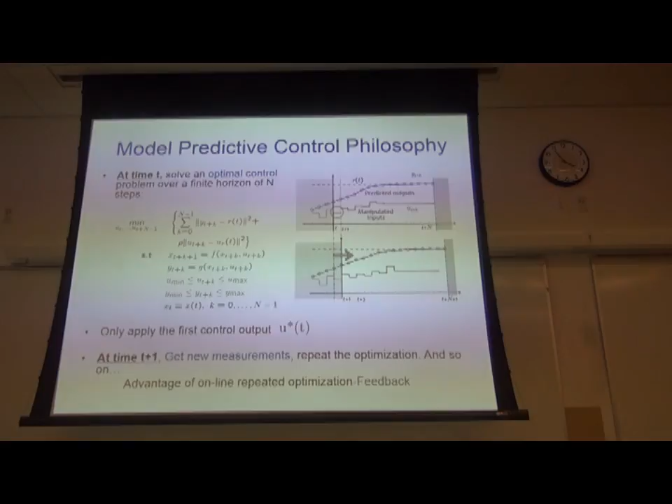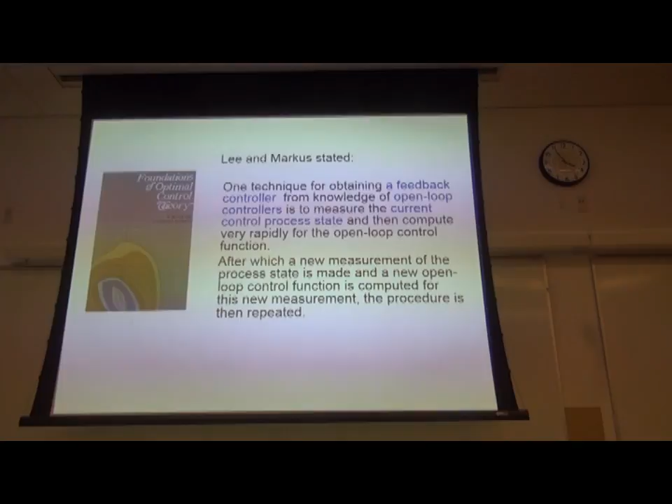So actually, this book was published in 1967. And in this book, Lee and Markus stated that to transfer open loop control to feedback control, we just measure the current control process state and then compute very rapidly the open loop control function. And by this way, we can transfer the open loop control to a feedback control.

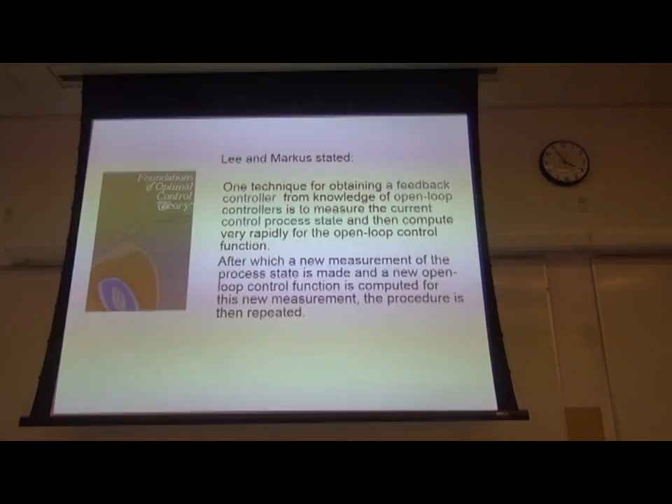And we can see this is the basic idea that model predictive control has used. So based on this idea, we can transfer RIOTS 95 to model predictive control, closing the loop.

Here we need to pay attention: RIOTS 95 provides three kinds of integration methods, Euler, Runge-Kutta, and Lobatto. For integral order, we just use Euler or Runge-Kutta. But for fractional order, we need Lobatto. It provides a higher accuracy method.

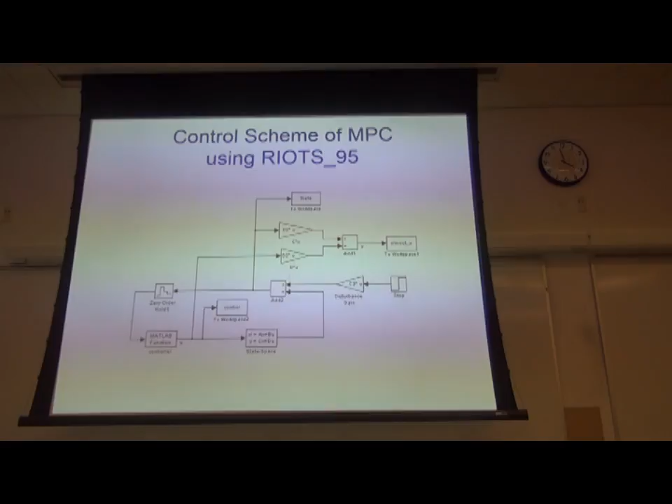Here we give the example of how RIOTS 95 MPC can control an unstable problem. We can say that this system has a positive root in the positive part of the complex plane. And we can see within 5 seconds it can reach the set point at 1. And this is the control output.

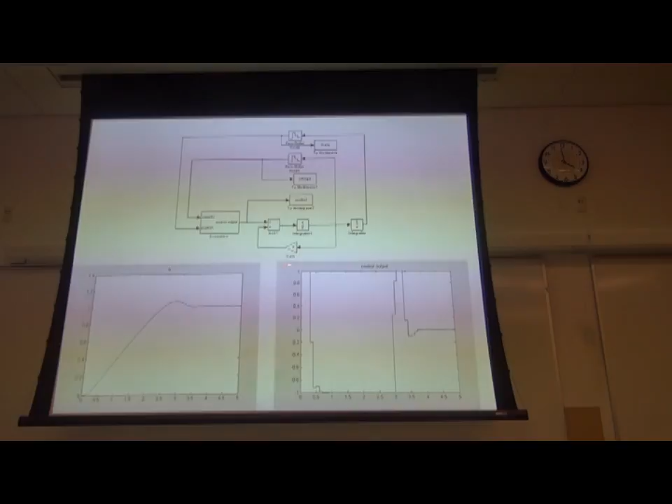Here we place the max value 1 at the control output. And here we have made a comparison with the MPC toolbox in MATLAB. And this is the example in the MPC toolbox in MATLAB. And here is the one built in MATLAB by RIOTS 95 MPC.

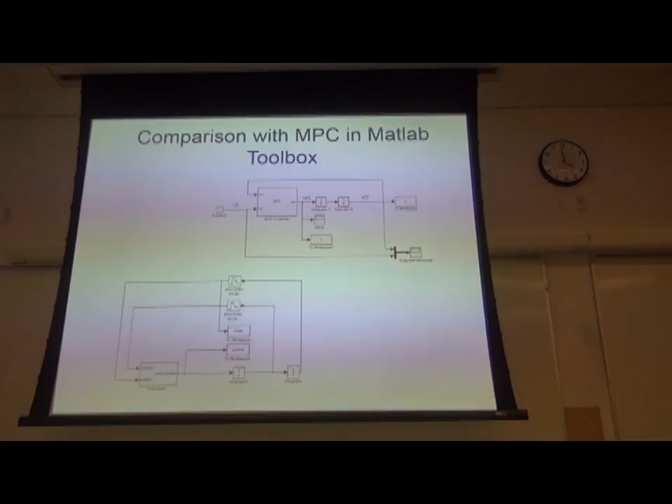And the sample time is 1.1, and this is the predictive horizon, and this is the manipulative horizon. And similarly, we have the predictive horizon, and we have the target value, that means the reference input, and here is also the reference input for the MATLAB Toolbox MPC.

And here we can see the dotted line is MATLAB MPC, and the solid line is RIOTS MPC. And here is the system output. Here we can see RIOTS MPC can get as good control performance as the MPC in the MATLAB Toolbox.

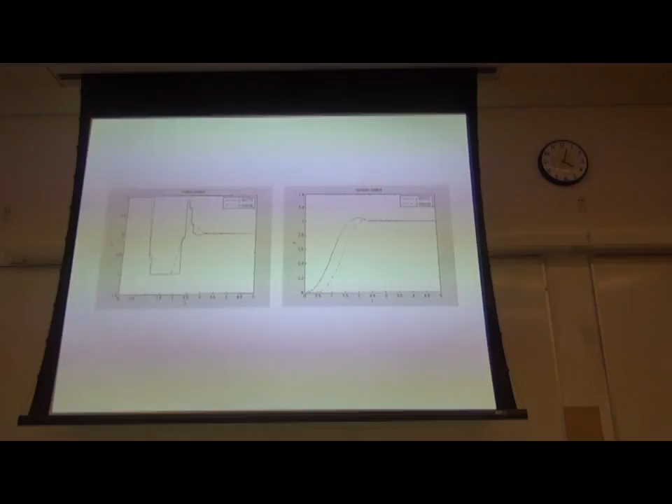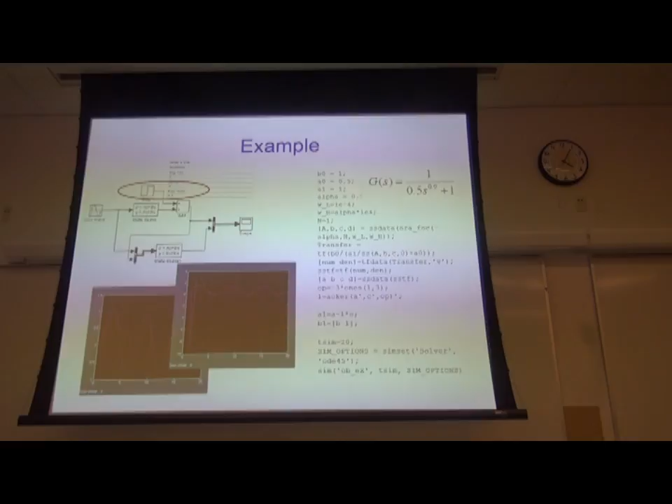And here is how we can extend the RIOTS MPC from integral order to fractional order. First, we use the Oustaloup recursive approximation to transfer the fractional order plant to an integral plant. And then we use the Luenberger observer to get the unknown state of the system. And then we use the RIOTS 95 MPC to control this problem.

And here is the control scheme of how RIOTS 95 MPC with observer controls the system. Here we should pay attention that the order of the observer may not be the same as the real system, because the real order of the system in practice we do not know. We just estimate.

So I give some examples to show that RIOTS 95 MPC can not only deal with a single input, single output system, but it can also deal with a multi-input, multi-output system.

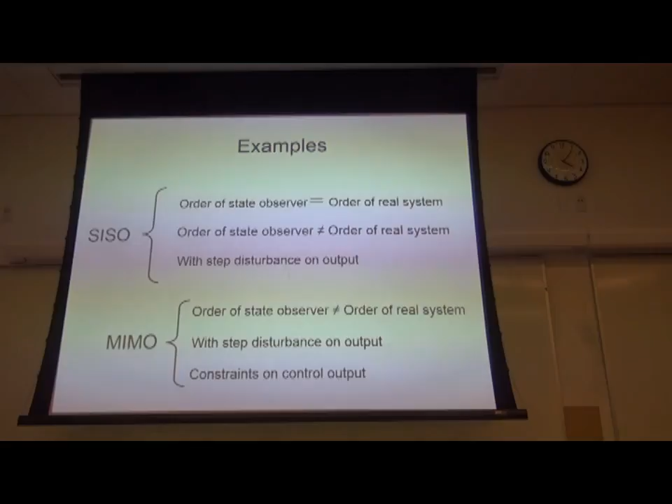Here is an example where the order of the observer is the same as the real system. We can see that the system output reaches the desired output. Here the set value is 10, and the control performance is good. And here we can see that the state obtained by the observer is really the same as the real system.

Here is the example where the order of the observer is not the same as the real system. Here the real system order is 9, and the order of the observer is 5. Here we can see that though the states of the observer are different from the states of the real system, the system output can also reach the desired output.

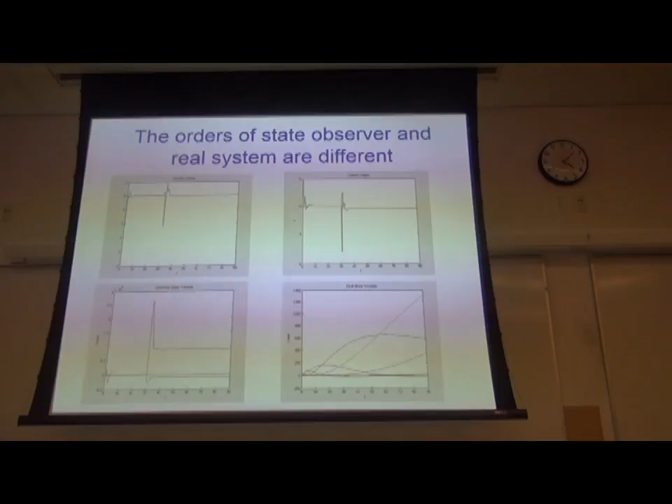And at 30 seconds we add a step disturbance. You can see that it can also reach the desired output as shown. And here I give an example of how RIOTS MPC can deal with a multi-input, multi-output system, for example the system described by this. It has 2 inputs and 2 outputs, and the desired output is 10 and 1 for the first and the second output. And here we also give a step disturbance at 30 seconds.

And here is the result. We can see the first and the second output can reach the desired output. And also at 30 seconds, when the step disturbance is added into the system, it can recover to the desired output within 3 seconds. Also note that this control output is as high as 12. So to show the constraints that RIOTS 95 can deal with, we place a control output constraint of 11 and 3 for each control output. Here we can see the control output is within the constraints.

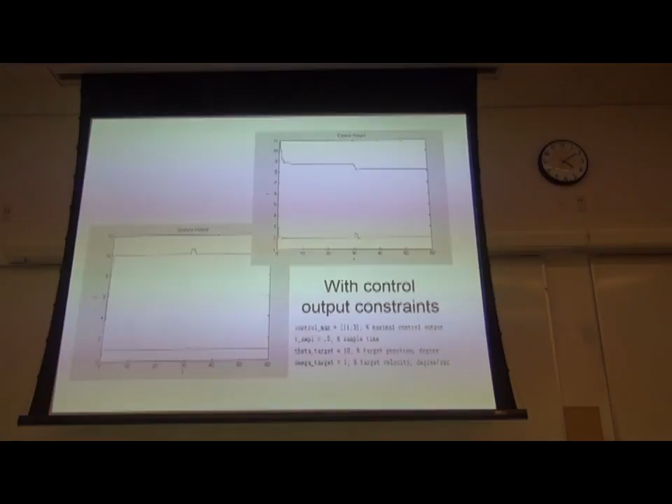And future work. From the examples shown, we know the RIOTS 95 MPC can deal with unstable systems, single-input single-output, and multi-input multi-output systems. But we did not deal with large time delay systems; I will try that.

Also, here we used the Luenberger observer to get the state of the real system, but this kind of observer is effective without stochastic noise. When there is stochastic noise, we may have to use the Kalman filter, and I will try that later. And later I'll try to test our RIOTS 95 MPC on this kind of TITO platform, 2 input, 2 output. That's all. Thank you very much.

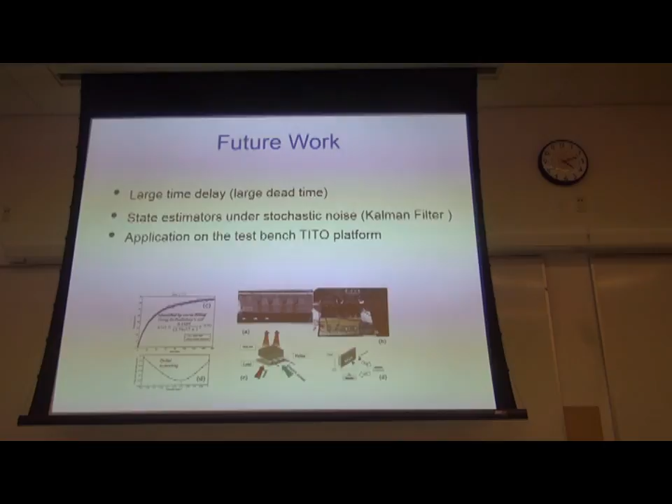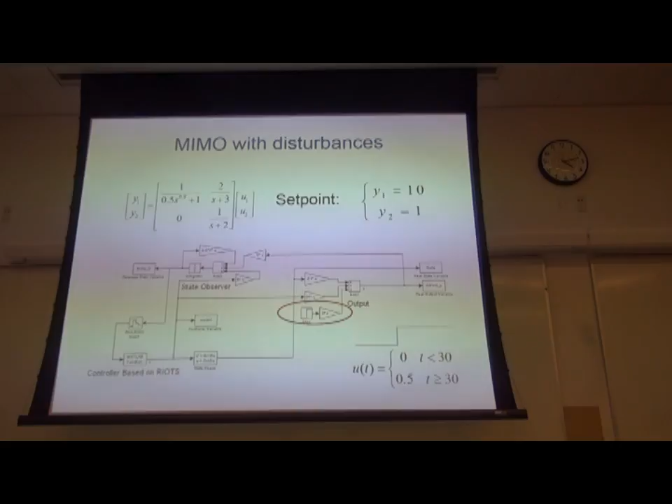Here's a question. I know that the first step in observer design is to check the observability of the system. Did you do that here, and how did you do it? You mean how to select the... Yeah. Observability question. Why observe something that is never observable? We check observability first.

Last question, if you still have one. Okay, there's a comment. So you use RIOTS 95. Do you have RIOTS 2013? That's an excellent question. Yeah, we have RIOTS 2013. It will be transferred to the Win64 platform, so you can also use it on Windows 64. And also I will make a friendly interface to RIOTS 95. So it will keep changing.